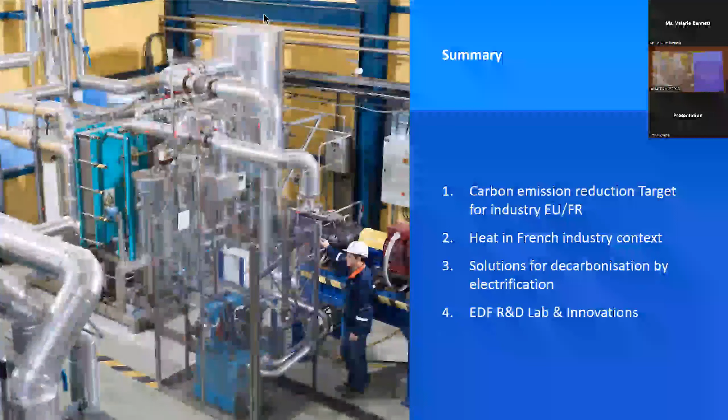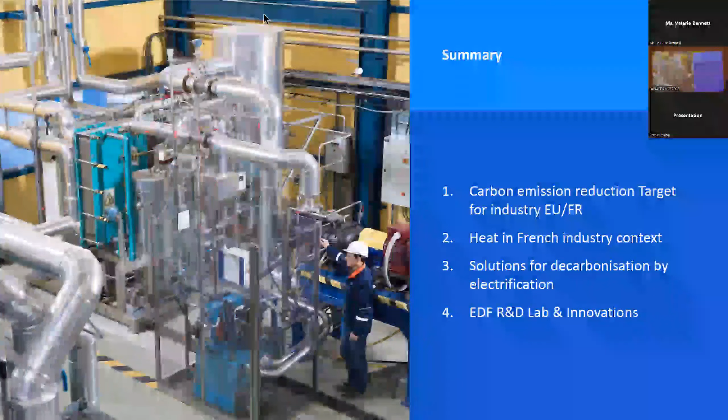I'm in a team dedicated to industry decarbonization, and I'm going to speak about some technologies and also how to innovate on these kinds of technologies. I will make a brief introduction about carbon emission reduction targets for industry in EU and France, but also a quick introduction about heat in the French industry, and then we will speak about decarbonization technologies and innovations.

So as everybody knows here, I think we have the Fit for 55, which targets lowering global emissions by 55% by 2030. And for France, for the industry sector, it's reducing 35% by 2030. These are really two quite important numbers, and 2030 is quite close.

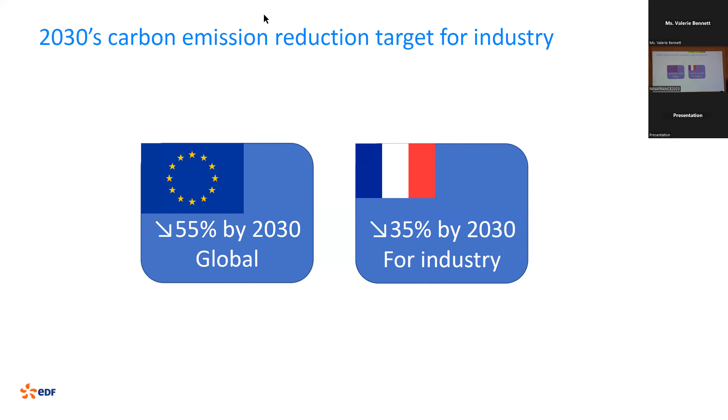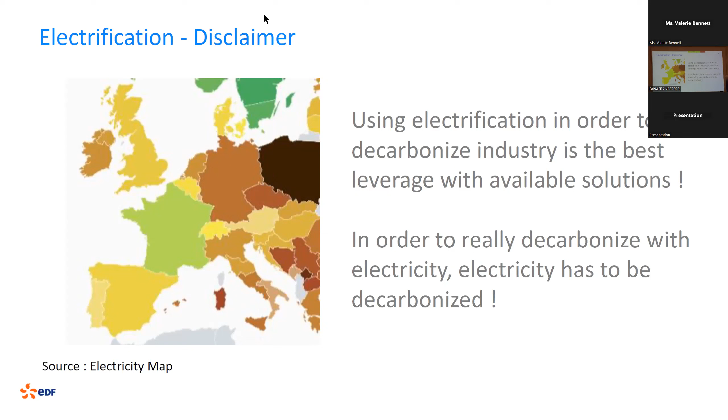A quick disclaimer about what I'm going to speak, because I'm going to speak about electrification of industry. Using electrification in order to decarbonize industry is the best leverage with available solutions. But in order to really decarbonize with electricity, electricity has to be decarbonized.

Just a quick introduction of industrial consumption in France, but the ratio in the data that I'm going to present to you is quite the same in every industry in the world. So in France, the global consumption of industry is around 370 terawatt-hours. And the most important part of this consumption is thermal uses, and most of the thermal uses are using fossil fuel for now.

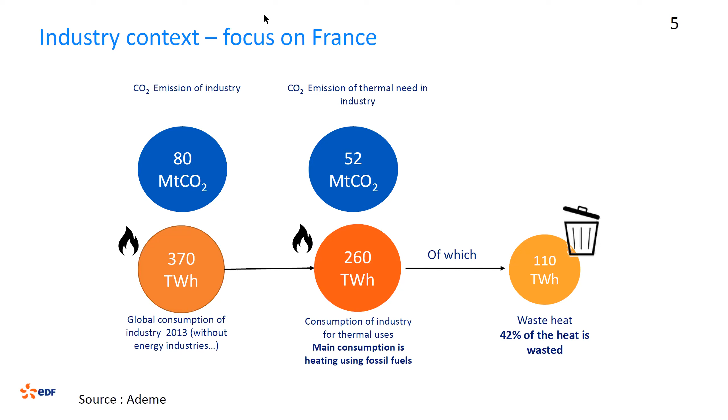What we can see on this slide is on the 260 terawatt-hours consumed, we find 110 terawatt-hours of waste heat. So that represents 42% of the heat, which is wasted. This is quite important for the next steps of the presentation.

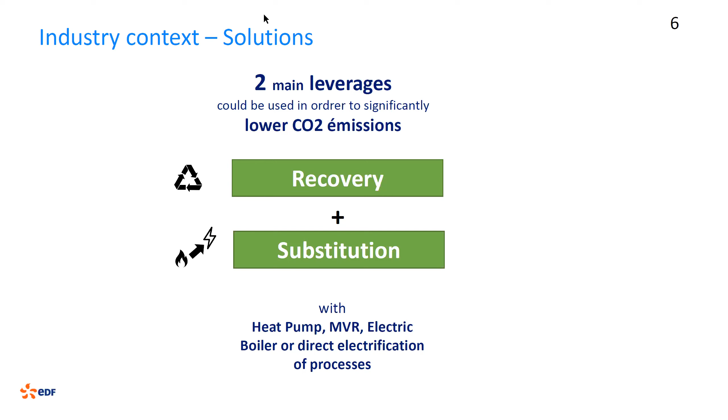We see two main leverages to reduce, in order to significantly lower CO2 emissions: recovery and substitution. I'm going to begin with the technology that combines both: heat pumps. Just a quick disclaimer again, these numbers are calculated with French emission factors, so with French electricity and gas emission factors, and with a COP of 4.

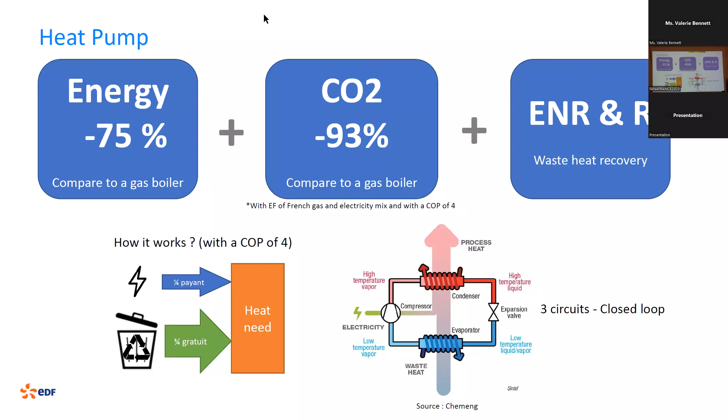So with heat pumps, you can reduce up to 75% of energy, you can reduce up to 93% of emissions, and you are recovering heat. I don't know if it's necessary to explain how heat pumps work, since there has been a lot of nice presentations from the colleagues here, so I'm going to continue.

In the industry, there is technology already available up to 120 degrees, and for a few megawatts, producing mainly hot water. There is demonstrator-level technology for more than 120 degrees up to 150 degrees producing water or steam, and lower TRL for up to 200 degrees.

On the 260 terawatt-hours of heat that we were speaking about just before, we think that the French market could represent 31 terawatt-hours for heat pumps. That could represent recovering 20% of the waste heat that we already have, mainly in three industrial sectors, representing 65%: paper, chemicals, and food industry.

This is, yes, quite French-based, but in order to understand which could be a good target, but I think we are a bit late now.

In the last net zero emission report from the IEA for net zero 2050, it's stated that for light industries, we need more than 500 megawatts per month during the next 30 years. I think the report was done in 2021, and I think we are quite late.

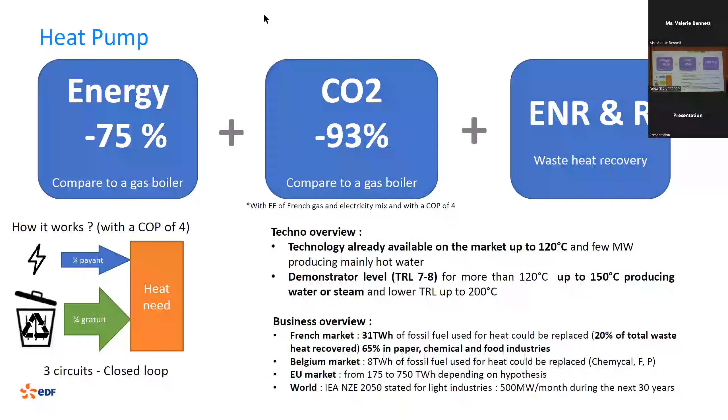Yeah, this is the statement, and that shows that electrification could play a major role in order to reach net zero by 2050.

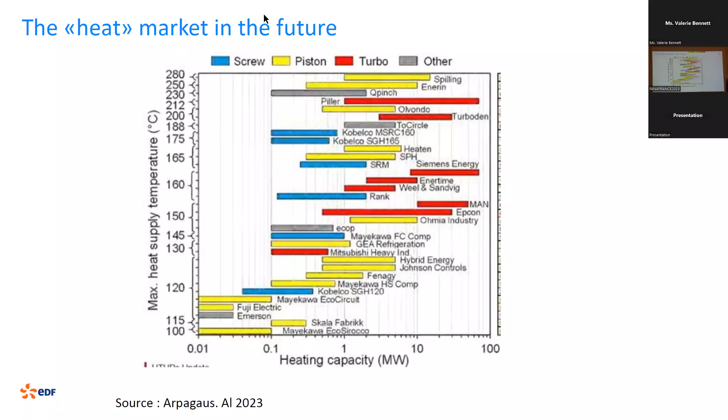This presentation is coming from Swiss researcher Cordin Arpagaus, with data from Annex 58 of the IEA. This shows you how solutions are available around the world. You can see that with heat pumps and mechanical vapor recompression, you can go higher, up to 280 degrees, and with power from hundreds of kilowatts up to a bit less than 100 megawatts.

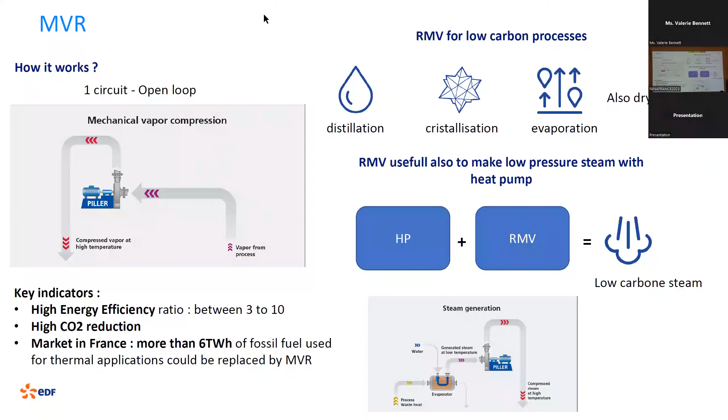I'm going to speak about another technology, mechanical vapor recompression. This is a compressor for vapor, so you can recover the waste vapor in your process in order to raise the pressure with the compressor and put it back into your process or another process. You can use this in distillation, crystallization, evaporation, and drying, the most known processes in industry, with energy efficiency ratio really high, between 3 to 10. I'm speaking about COP, not energy efficiency ratio here.

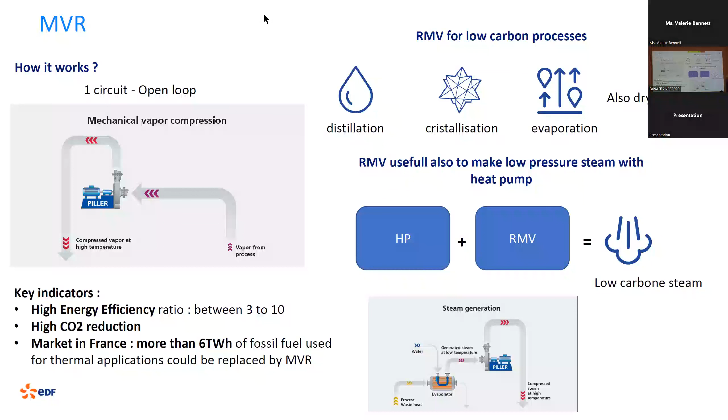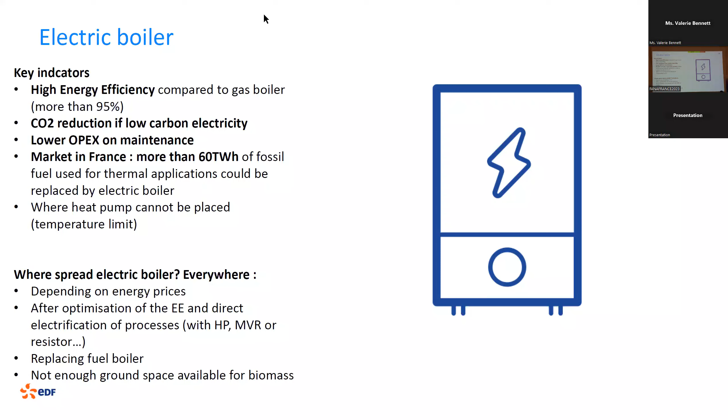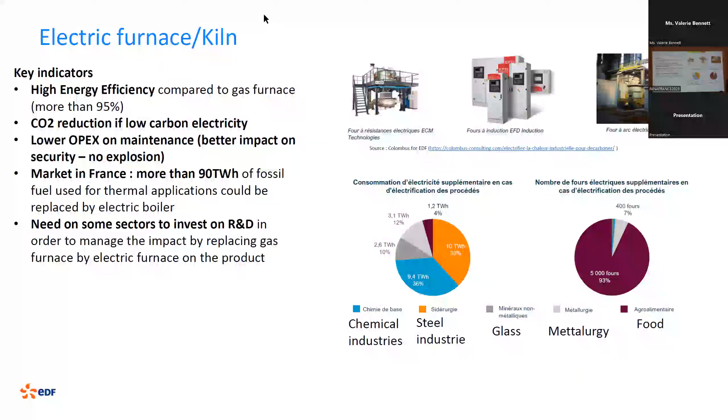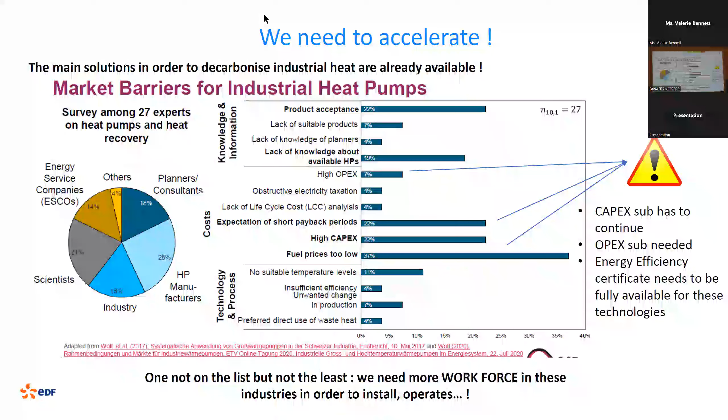On this main barrier, I would like to insist on maybe the most important point in order to go fast, one not the least: we need more workforce in these industries. When I say these industries, I mean the industries that produce the technologies I was speaking about. In order to install and operate the technologies, we already see the limit of the workforce available.

So, speaking a bit about innovation. At EDF, we have worked on 3 main projects in recent years in order to answer the market with very high temperature heat pumps. The first one was led with GCI, to produce 130 up to 140 degrees, with a natural fluid, water, in order to answer the main industries for food and chemistry. We hope to spread these technologies in the coming years.

The other one was an EU-funded project in Horizon Europe, named Bamboo. The main objective of this project, with our 2 main partners in this work task, AIT and ArcelorMittal, was to develop and test in labs and on the test facilities of ArcelorMittal and EDF, the 5-bar steam heat pumps.

The last one, which I'm going to do a quick focus on, is the development of transcritical heat pumps, which permit achieving high COP in order to produce heat up to 150 degrees, mainly for dryers. We have done a project on the paper industry that I will present.

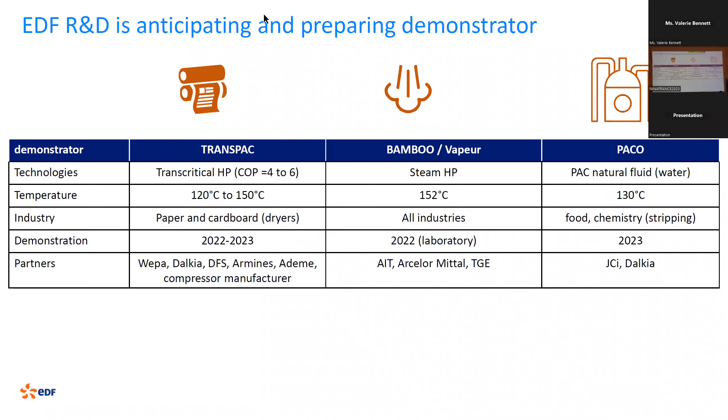So the Transpac project is an ADEME-funded project with the partners on the slide: Wepa for the customers, so the paper industry, EDF, a subsidiary of EDF named Dalkia which operates district heating and works in decarbonization of building and industry, and also a university named Armines. The goal of this project was to build the first industrial demonstration of a transcritical HFO heat pump at full scale, 600 kilowatts, on a dryer.

The industrial site was the Wepa Greenfield site in the east of France. The technical target was to preheat the inlet hot air from 97 to 138 degrees with a COP around 4, using mist at 80 degrees as a waste heat source. The important point here is that transcritical permits us to have a COP doubled compared to subcritical heat pumps. The duration of the project is 5 years. The commissioning of the demo was this spring in 2023, the demo is running, and the COP target was reached in July 2023.

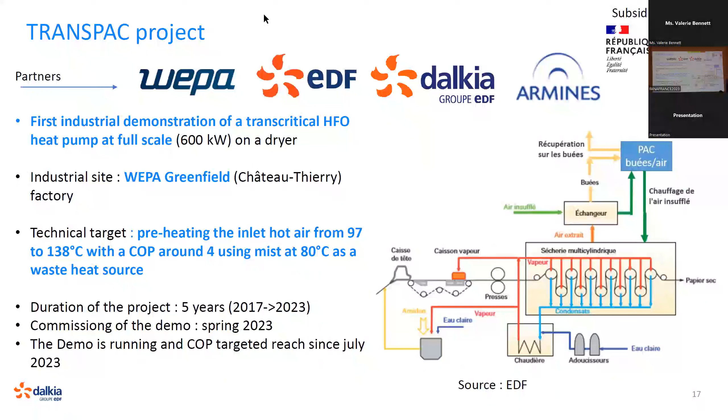During this project, we've done a lot of things: consolidating the design, de-risking the industrial design, doing the conception, the integration on site, and the running for the demonstration. Now we are able to decarbonize dryers with these kinds of technologies, and that shows the time it takes in order to have efficient solutions.

The important thing is that when we decided in 2010 to develop these technologies, and now we are in 2023, it takes 13 years. So if I have something important to say, it's that if there are new regulations that can change the way technology could be developed, it's important not to impeach efficient solutions from appearing on the market.

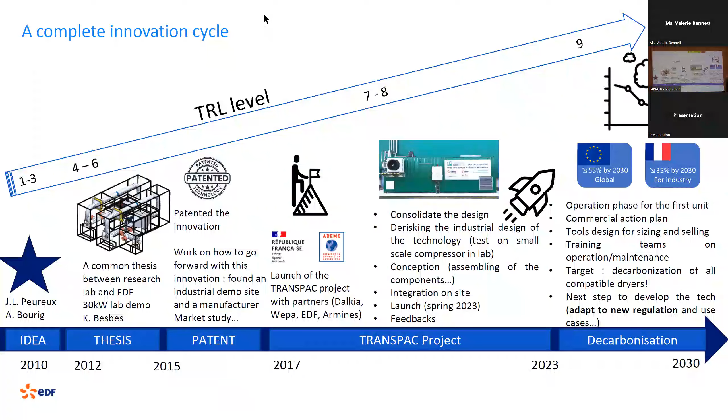I would like to finish by giving a signal: we have some laboratories available to test industrial heat pumps. So for industrial customers who are interested in heat pump solutions, we can help de-risk technologies and assist manufacturers in their development of new high temperature heat pumps, and facilitate the integration of heat pumps in the technology mix and new architecture.

We are here to speak about energy efficiency. I think one of the things that could change in the near future is not to avoid speaking about energy efficiency ratio, but maybe to speak about an energy efficiency ratio that takes into account the waste heat you can recover. Just to give an example, when you have a dryer, you can do it with hot air, but you can also do it with superheated steam.

It is two really different technologies. With these two different technologies, you can improve the efficiency by 30 to 40% between hot air and superheated steam, which is more efficient. The efficiency you can reach with superheated steam dryers is quite close to the minimum energy that you need to dry your product.

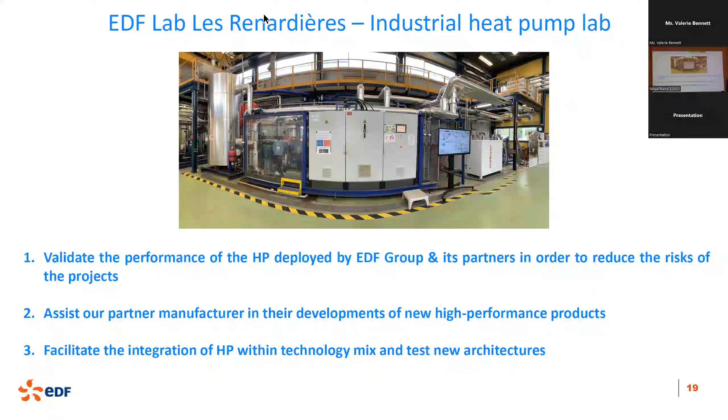And that's the conclusion of my speech. Thank you very much.